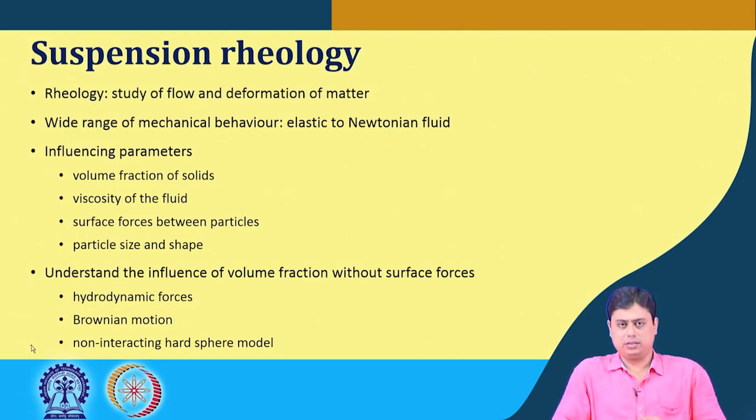In this hard sphere approach, in a Newtonian liquid, the addition of spherical particles increases the viscosity due to additional energy dissipation related to hydrodynamic interaction between the liquid and the sphere. So as we increase solids concentration in a Newtonian suspension, the viscosity typically increases.

Einstein proposed a relation between suspension viscosity and liquid viscosity, that is, viscosity without any solid particles. In this expression, mu_s is the suspension viscosity, mu_l is the liquid viscosity, related by the volume fraction of solids, which is 1 minus epsilon, where epsilon is the voidage. Since epsilon is the voidage, 1 minus epsilon is naturally the volume fraction. So 2.5 times the volume fraction plus 1, multiplied by mu_L, gives us mu_suspension.

This expression holds true for very dilute suspensions, roughly when solids concentration is less than 7% by volume. The basic assumption made while proposing this expression was that particles are far away from each other, so there is no influence of one particle on another. That was the definition of a very dilute suspension.

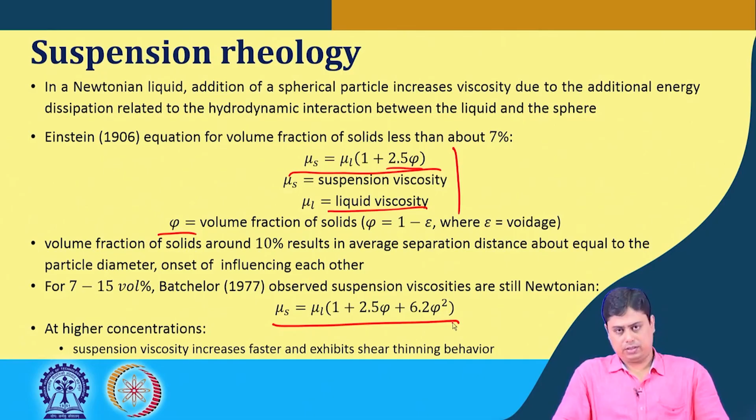So what happens here is that, at rest, in this moderately suspended concentrated suspension, the particles will have Brownian motion, and this Brownian motion actually dictates the suspension rheology. So any addition to the solids concentration in that suspension, its viscosity is dictated by that amount of concentration.

Initially, for a particular concentration, it will have a Newtonian-like plateau at the lower shear rate. As the shear rate is increased, the hydrodynamic interactions become higher and more dominant than the Brownian motion, and the particles will be in a more arranged manner, a kind of layered state, which is also called the preferred flow structure, shown here. So from a random position, the particles become more organized, and the viscosity becomes smoother or lower.

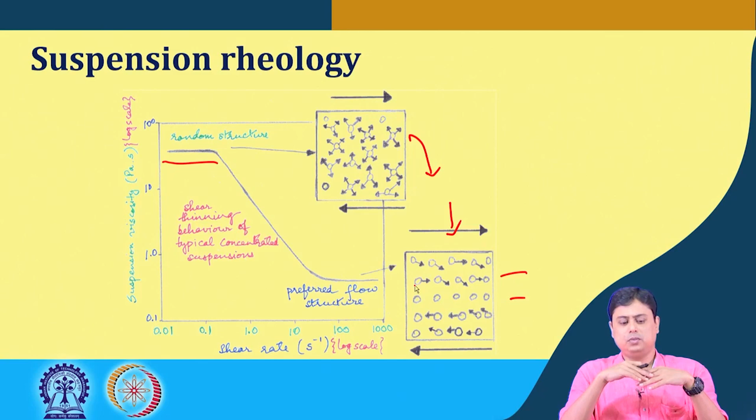This transition from a low shear rate Newtonian plateau to a high shear rate Newtonian plateau is the shear thinning behavior. At lower shear rate, Brownian motion dictates the suspension rheology. As we increase the shear rate, these hard spheres, meaning non-interacting particles, become more organized into sheets or layers, and the flow becomes much smoother. That means the viscosity goes down. So this transition is the shear thinning behavior.

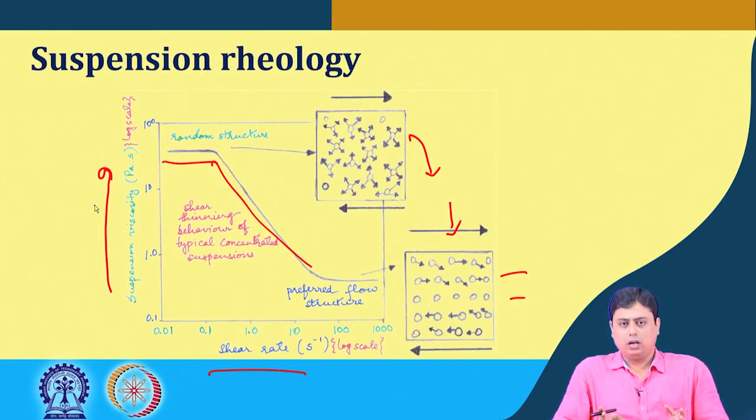Here it is the shear rate versus the suspension viscosity, both in log scale. So this is what happens in the case of non-interacting particles.

Now for highly concentrated suspensions, there is no first-principle model to predict the rheological behavior of such concentrations, but as in other sections we mentioned, several semi-empirical models are available to help understand this concentrated suspension behavior. One such model is mentioned here, a simplified form where this first term represents either the low shear rate Newtonian plateau viscosity or the high shear rate Newtonian plateau viscosity. This phi max is a fitting parameter considered as a measure of the maximum packing limit or packing fraction of the fine particles or powders.

So such a suspension, under very high shear rate and high solids concentration, leads to its maximum packing fraction. What happens is that the structure developed, the sheets or layers formed at the high shear rate Newtonian plateau, becomes unstable, because now we have more solids concentration and very high shear rate. This destabilizes that preferred flow state or structure.

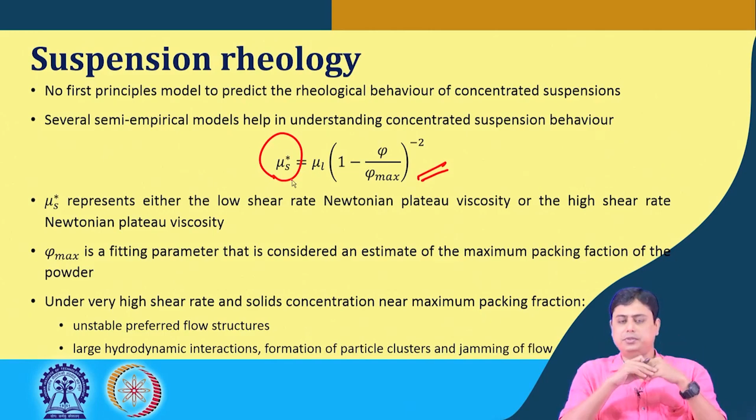So this is what happens schematically. Below a certain volume fraction, it is Newtonian, meaning the viscosity does not change with shear. Now it is a constant viscosity system.

Now as the shear rate increases with concentration, we have this low shear rate Newtonian plateau initially, and then it exhibits shear thinning behavior, followed by a high shear rate Newtonian plateau. This is all happening because of the arrangement or rearrangement of the particles in the suspension, from a Brownian state to a more organized, layered kind of state.

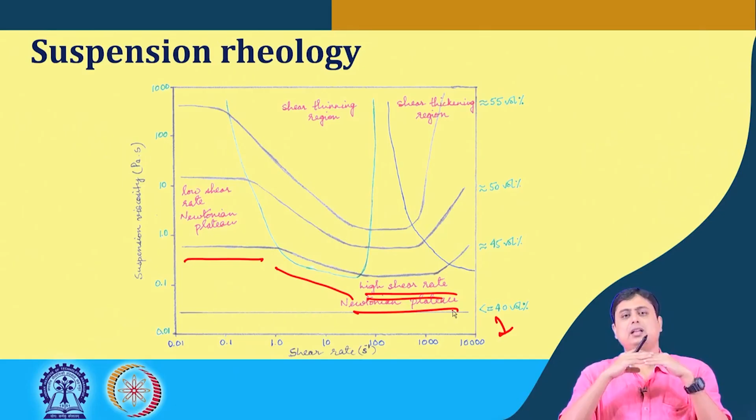With increasing shear, there is a smooth movement of the fluid, but at a very high shear rate, this Newtonian plateau is arrived at when it has reached the preferred flow structure limit. For a time being, this state is not further improved, or there is no space to improve it further, meaning that stage remains for a certain time. That also depends on the particle type.

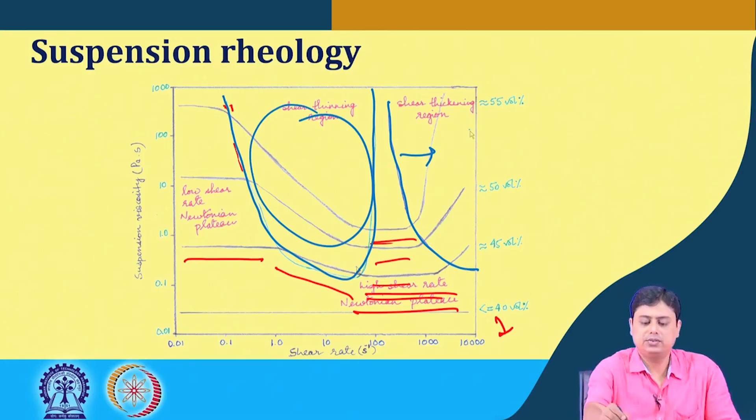So, these lines are basically having a zone, or it is showing a zone of shear thinning, and this is the shear thickening zone. Which means here in this region we can see that the viscosity is going down, and in this region we can see the viscosity is going higher.

So, this is all happening again due to the particle rearrangement in layers, and after that, that layer is broken due to the high hydrodynamic interaction, and that leads to the cluster or the aggregates of the particles, which is called the hydrodynamic cluster. It then blocks the flow, it makes the flow more difficult.

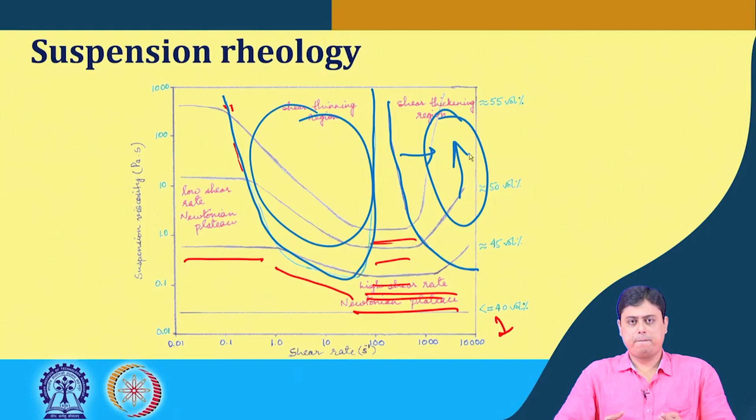Now, when there are repulsive forces, we are talking about the particles in the suspension, but the interaction between them is repulsive in nature. So, what happens? It similarly behaves as the hard sphere approach or the hard sphere behavior when they are separated at a larger distance, in the range of repulsive force, because then there is proper dispersion, since we have seen that attractive force tends to form aggregates. Now, if the particles are separated at a long range repulsive force, then these are more dispersive in nature, or there is more dispersion, uniform dispersion can happen with these repulsive forces.

And this is indeed true for low volume fraction or relatively large particles, because at low volume fraction these particles are separated far away from each other. Once we increase the volume fraction, there is overlapping of this repulsive force field, and that leads to an increase in viscosity compared to the hard sphere.

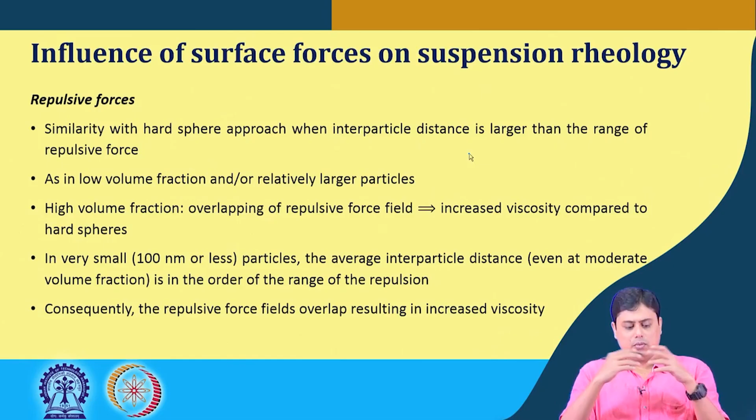Now, for very small particles, say 100 nanometers or less, the average interparticle distance even at moderate volume fraction is in the order of the range of this repulsion. That means, in this case we will have enhanced or increased viscosity, because the repulsive force fields are overlapping. So, that leads to increased viscosity.

Now, also for dilute suspension of repulsive particles, we will have larger viscosity than hard spheres, because of this additional viscous dissipation of the fluid flow through this repulsive region around the particle. Now, such phenomena in case of suspension having electric double layer is called the primary electroviscous effect. That means, even for a very dilute suspension of particles, there would be larger viscosity, although the behavior is similar, but there would be larger viscosity compared to simple hard spheres, because of this additional viscous dissipation that would happen in the repulsive force field.

So, a suspension having an electric double layer, this phenomena is called the primary electroviscous effect, and the total drag on the particle and the EDL is greater than the drag that was considered in case of the simple hard sphere model. However, there is an insignificant increase in viscosity due to this primary electroviscous effect.

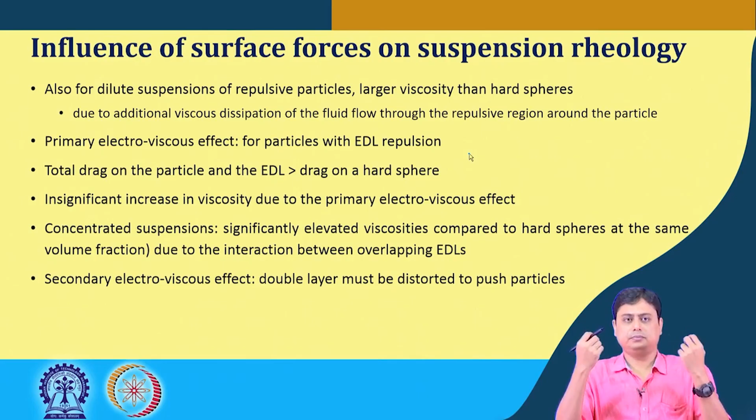Now, when the concentration goes higher with such particles, there is significantly elevated viscosity compared to that of the hard sphere model of same volume fraction and same material, due to this interaction between the overlapping EDLs. Now, in the ideal suspension, the EDLs are overlapping, that has tremendous repulsion. So, when we try to push the particles closer, there is the secondary electroviscous effect, where this electrical double layer must be distorted in order to keep them in contact, and that phenomena is called the secondary electroviscous effect.

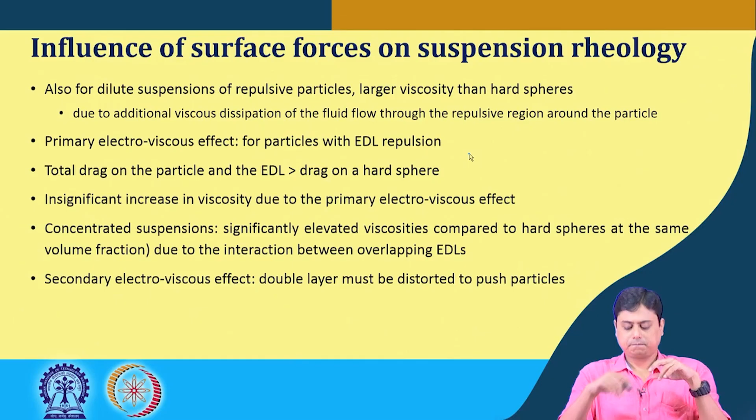So, the influence of repulsive force in suspension can be measured in terms of effective volume fraction of the particle. What is effective volume fraction? It is the volume fraction of the particle plus the fraction of the volume occupied by the repulsive region around the particle.

This EDL layer, say. So for example, in this schematic, this could have been the actual particle arrangement and the voidage calculations in between these. But with the repulsive forces, or the EDL layer, there is this layer which actually occupies some virtual space. So this total volume becomes the effective volume rather than the actual volume of the particles.

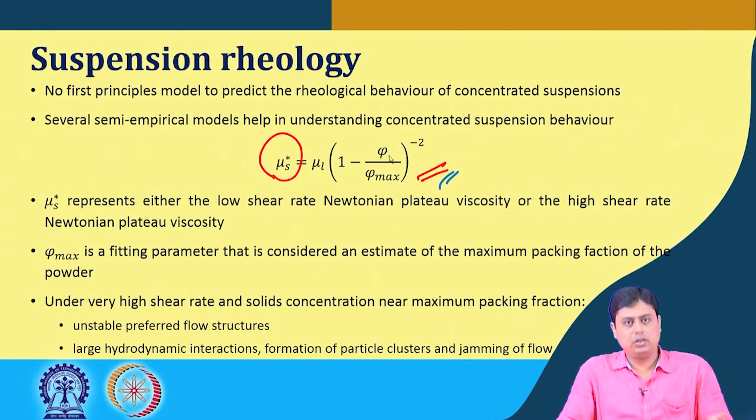So the volume fraction of the particles plus the fraction of volume occupied by the repulsive region around the particle is the effective volume. Now, the previous expression that we have seen for the concentrated suspension, if phi is replaced with phi effective, it actually predicts the behavior of such suspension.

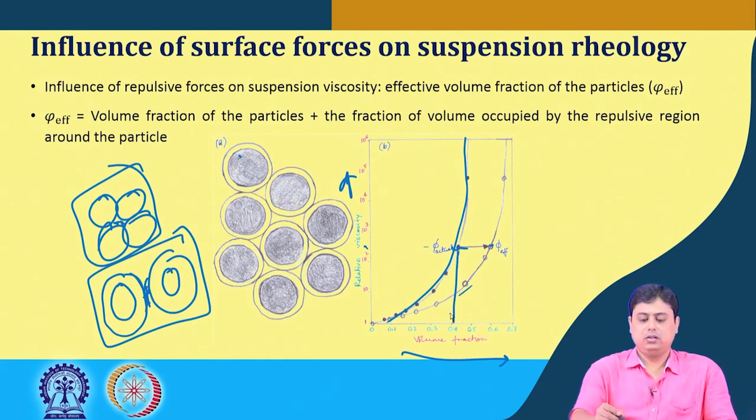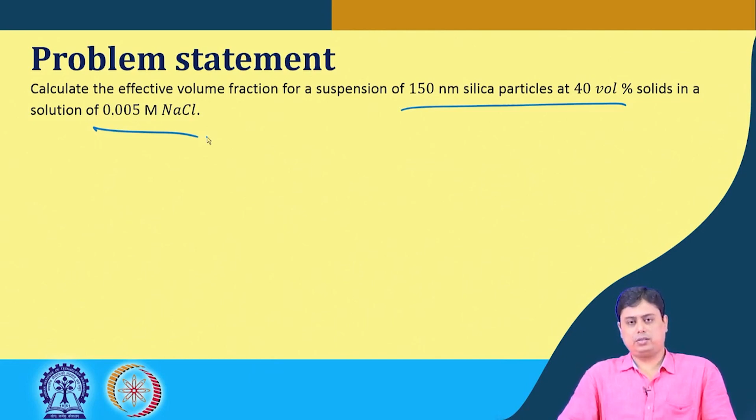So how does it matter? Consider this problem statement: you have to calculate the effective volume fraction for a suspension of 150 nanometer silica particles at 40 volume percent solids in a solution of 0.005 molar. So this is the actual volume fraction of these silica particles of known diameter in electrolyte. What is the effective volume fraction? How do we calculate such a scenario?

If we use this knowledge that we have just seen, phi effective is basically the volume of solid plus the excluded volume, which we did not take into account, but which is there when it is immersed in the electrolyte, divided by the total volume.

So for particles stabilized by EDL repulsion, excluded volume from the range of repulsion can be estimated by the Debye length that we have seen earlier, which is a measure of the range of this EDL force as well as its thickness.

So inverse Debye length, we have seen this as a function of salt concentration, and for monovalent salt this was the relation we have seen earlier, and it provides this inverse Debye length.

So for 0.005 molar NaCl, we have this as kappa, which means the Debye length, the inverse of that, is 4.3 nanometer.

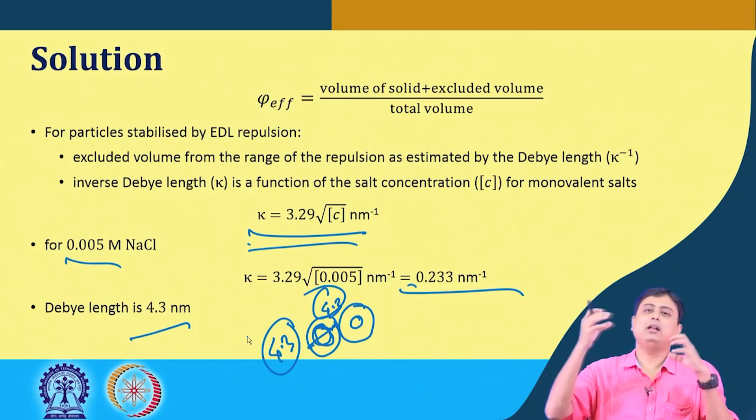So the effective diameter becomes its original diameter, which is 150 nanometer, plus 4.3 plus 4.3, and in such a manner all other particles are there. So considering only one particle, the volume of a single particle is this one.

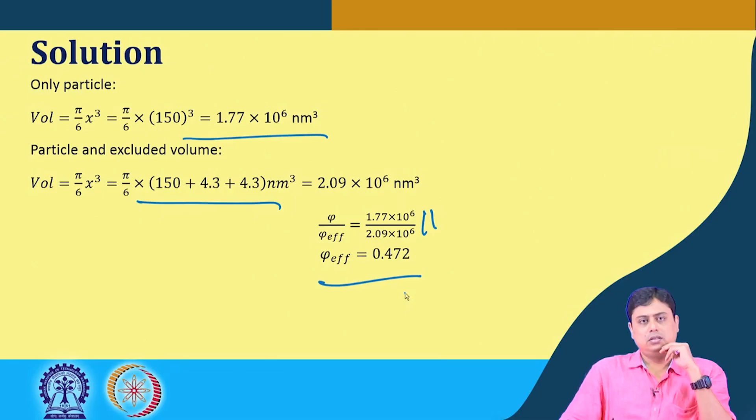But the particle with the excluded volume—excluded meaning excluded during the consideration of calculating its volume fraction—would be this one, and the ratio of these two is basically the effective volume fraction. So this is how this knowledge is useful in this case.

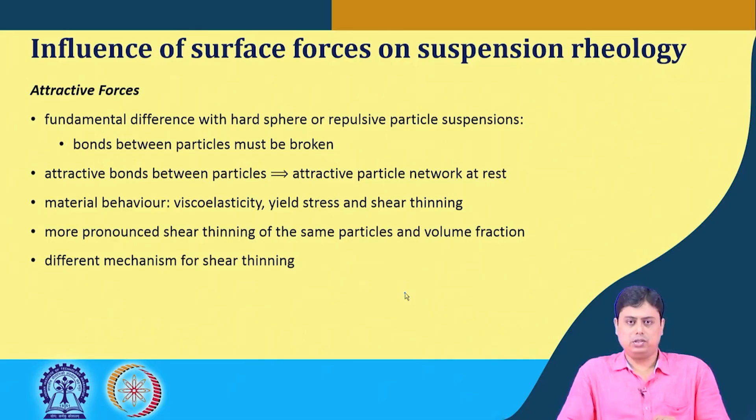And now we will see what happens in case of attractive forces. So after the hard sphere approach, we have seen that if particles are repulsive in nature, it behaves similarly. But what will happen in case of attractive particles? We will continue this in our next class, and see how the overall influence of these forces happens in a particular case, such as sedimentation, the liquid-solid separation, which is one of our intentions initially, and how this knowledge helps from that perspective.